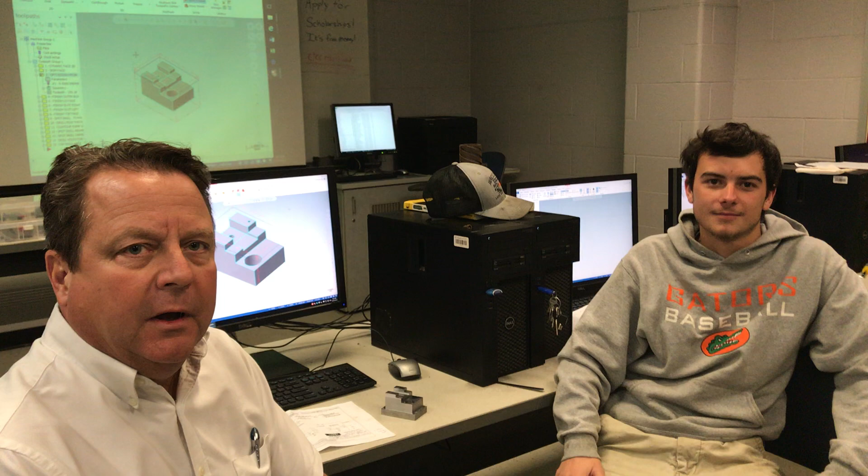All right, my name is Mr. Geppert, and I'm here at Cape Fear Community College Computer Integrated Machining Program to show my students how to best use dynamic roughing in Mastercam. And we learned something new here a little while ago, courtesy of the Barefoot people, and we're here tonight to talk about it.

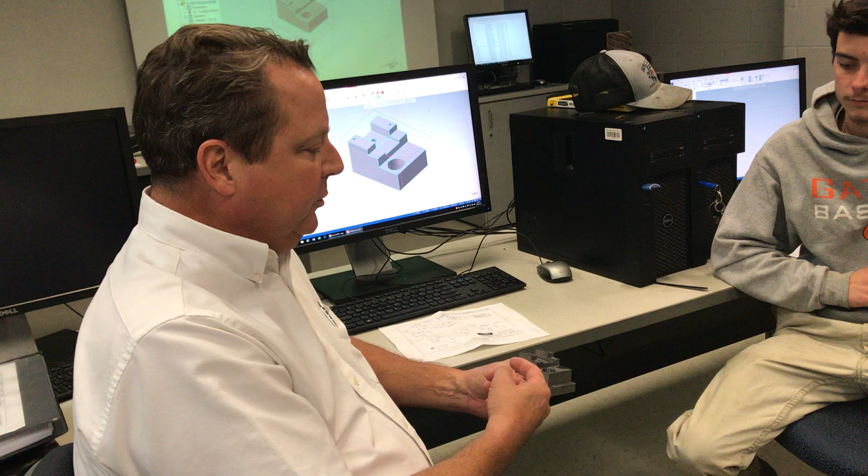In the past, we were making this step block from NIMS. And in the past, we had to attack the part using different Z levels and different tools, actually. But we found on a different part that had pockets that you can use dynamic OptiRough, which had in the past only been used for 3D parts, for 2D parts and not have to worry about the Z levels anymore.

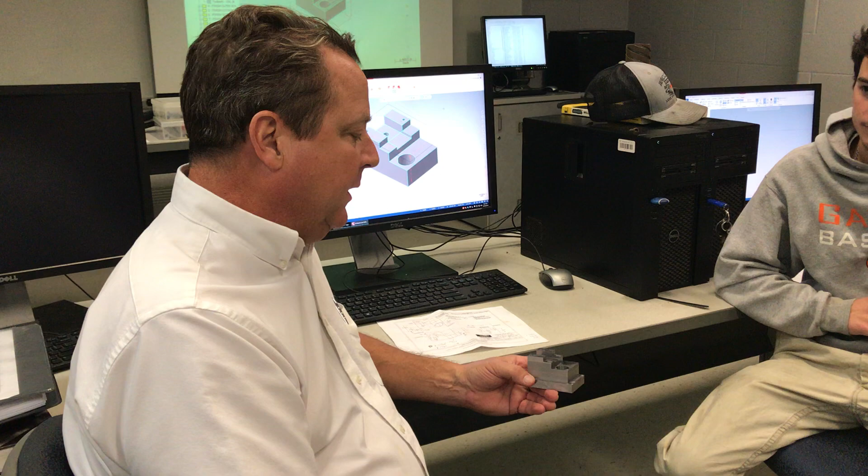The way this comes about is mainly through the fact that if you set the step down to equal the step up, and you set an outer border, and then tell it to take a strategy from the inside, Mastercam pretty much figures out the rest of it on its own. The roughing of the outside, the roughing of this step, and this slot was all done in one toolpath. So,

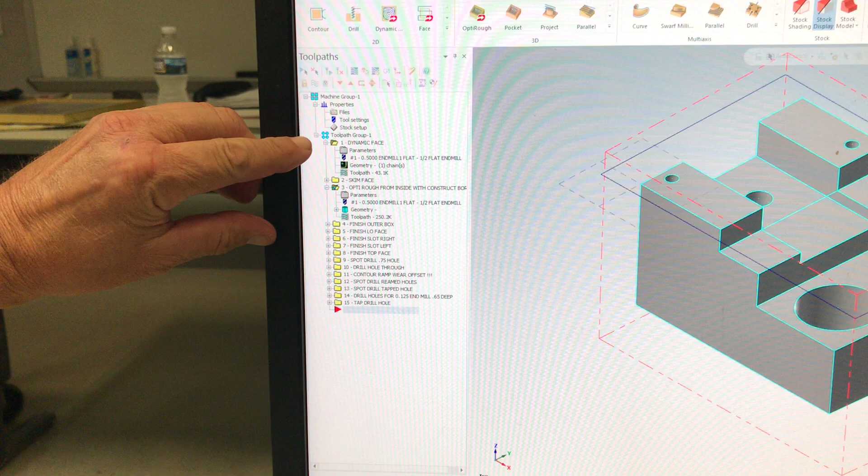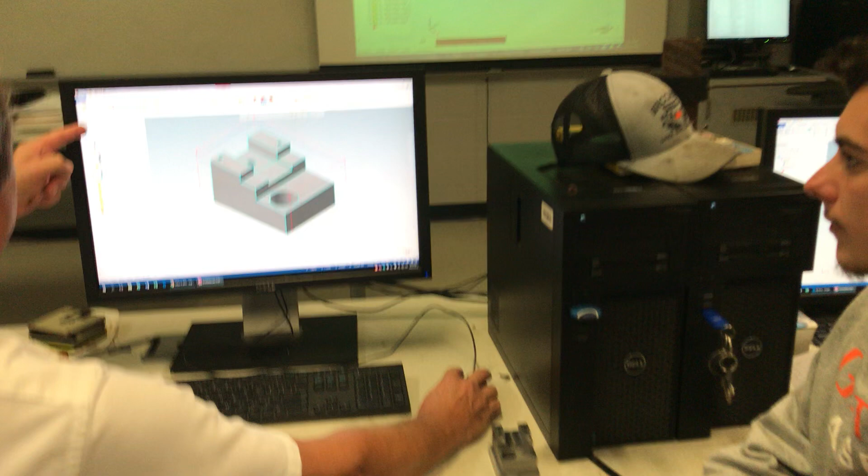if you would please come up, Austin, and show them the toolpaths that you use to make this whole part. All we're going to talk about here is dynamic facing and OptiRough from the inside with the construction border. The construction border is this blue line that we drew around the top of the part that is only slightly larger than the stock box. All right? So, I went up here on the 2D toolpaths and just chose the standard facing toolpath.

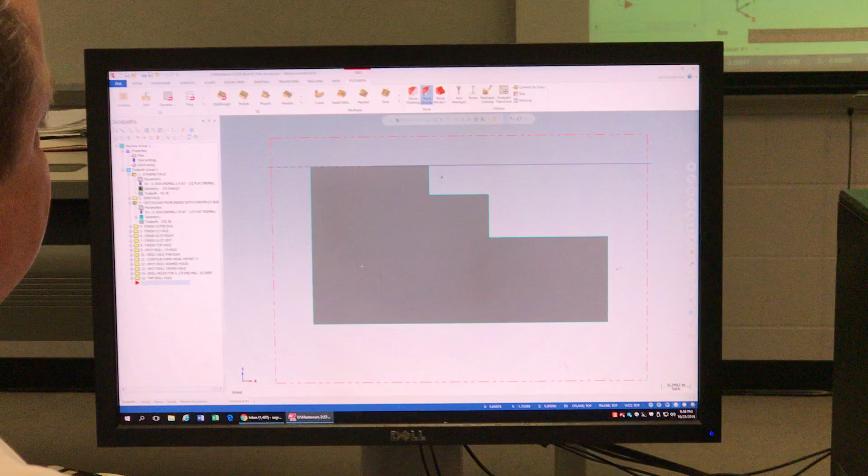By the way, this is tool steel, A2 tool steel, and we left about 1/4 inch of stock on the top, quite a bit on the bottom to hold it. As you can see here, that's what we had in the vise to hold it. And we left 1/4 inch of stock on top, and we used dynamic facing to face off the stock. Here are the parameters for dynamic facing. We just used a 1/2 inch flat end mill.

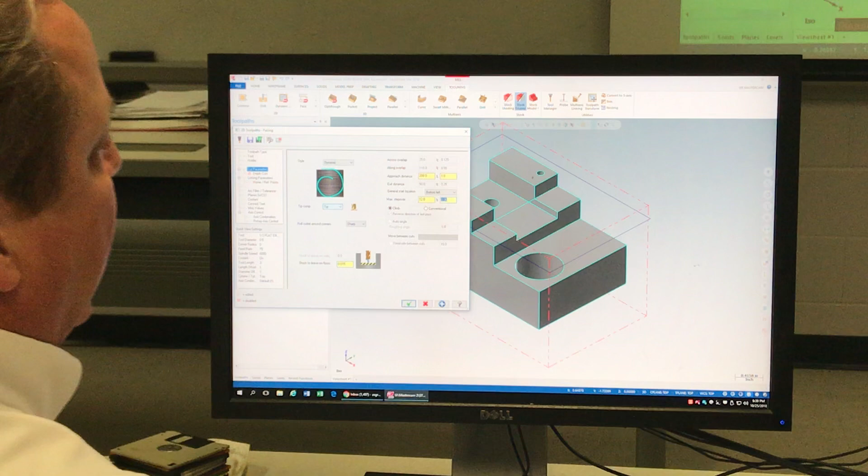We set a feed rate, and we turned it up on the machine, really, of about 75 inches per minute and 6,000 RPM, which is about 785 surface feet per minute. The cut parameters were here. We set the style to dynamic, and we set an approach distance of 1 inch away, and we set our step over. We could have been a little bit more generous, maybe 10 or 12% would have been fine for this dynamic roughing. We left 15 thousandths stock on the floors because we wanted to come back with a 3-inch face mill to leave a nice smooth finish on the face.

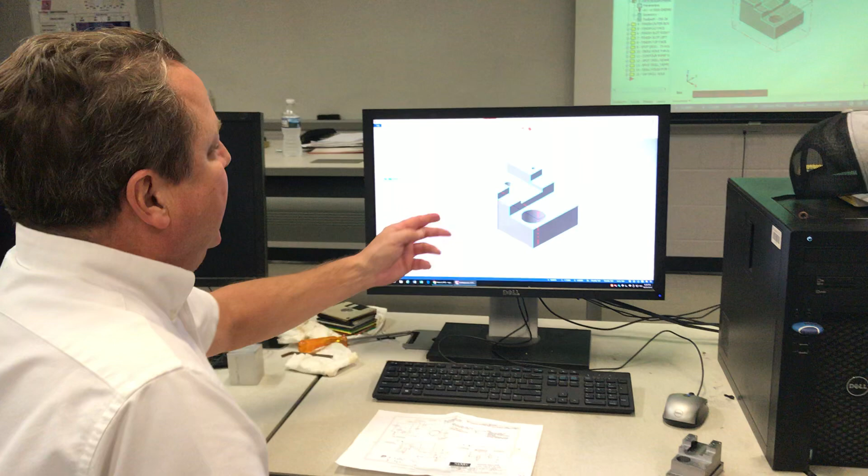Okay, now the linking parameters were all the same since we left the stock there. But here's another thing that they showed us at Barefoot CNC: this arc filter tolerancing can be set so that you cut down greatly on the amount of code that goes out on the machine. This was a problem for us. Our machines don't hold a lot of code, and we were having to cut up toolpaths or just send one toolpath at a time.

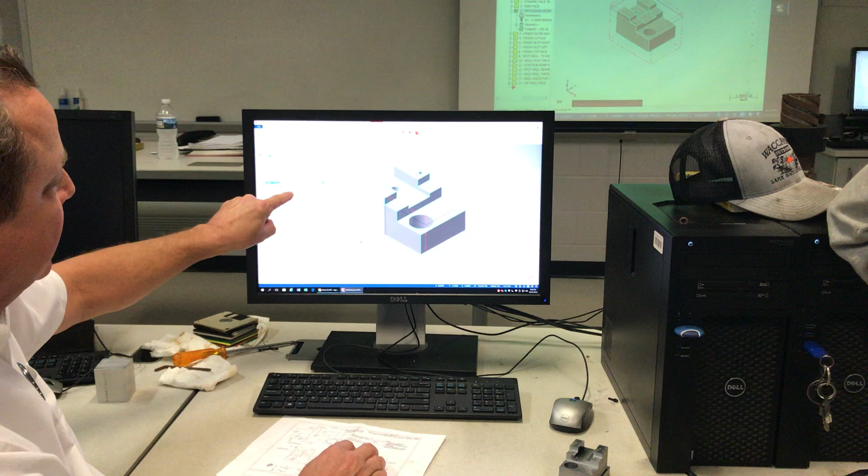We set the total tolerance here to 5 thousandths, and that cut down a lot on the code, but especially setting the line and arc filter settings, we just checked these 3 boxes, and then you set the line arc tolerancing to 50%. So what this does is the lines and arcs are not drawn so nicely and tightly, and it cuts down like 80 or 90% on the amount of code.

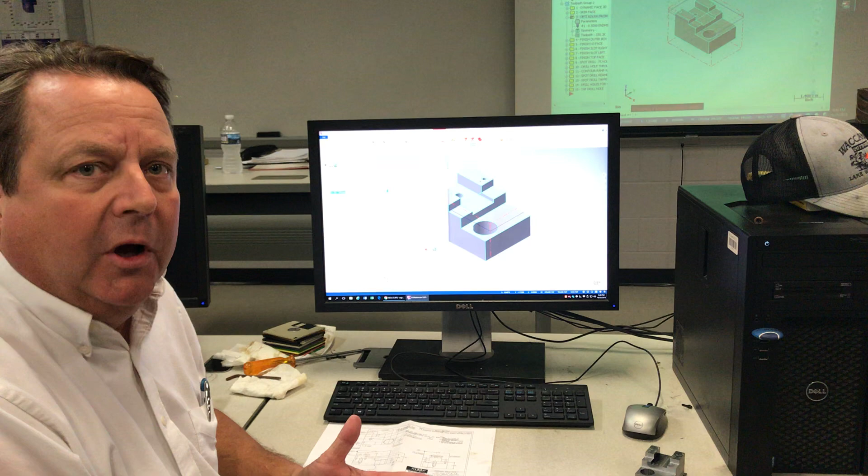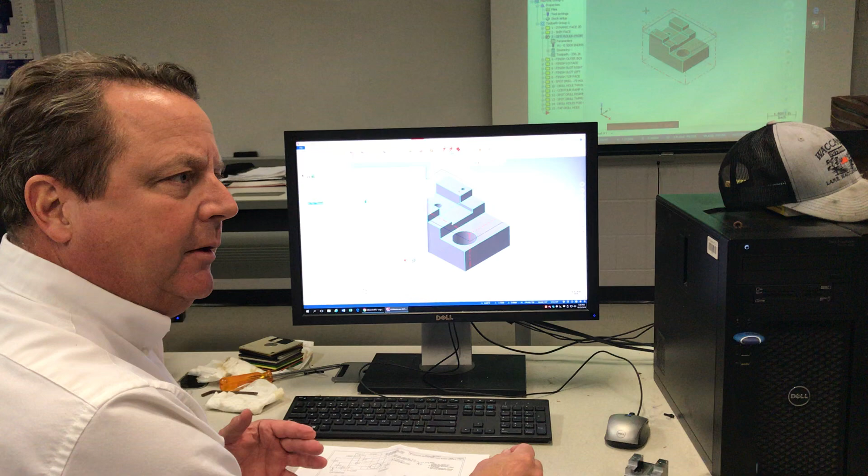Well, why not? We are just roughing. We're just cutting a rough part. We don't care about the finish necessarily all that much either. We want our tool to last, and we want to get rid of material. But mostly we want to get rid of material. We don't care really all that much about the false economy of a tool lasting. If the tool lasts a decent amount of time and we get our part off of the machine in 70% less time, well, that's wonderful.

So that's dynamic facing. That's been available to us for quite a while. So let's quickly backplot this and look at the amount of time, 1 minute and 38 seconds to do that, and the toolpath used 31K of code.

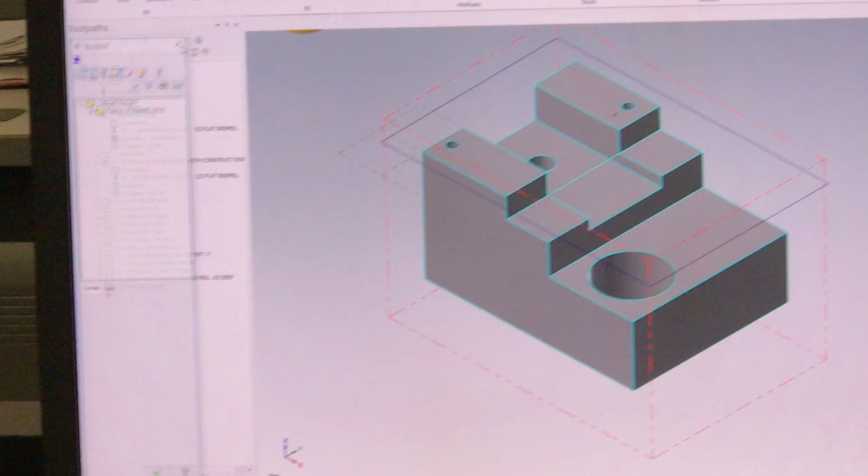If I go back and I change this to 1/1000th tolerance, and I take the line filter off, and I change this to 5%, say, the cut tolerance, to 1, apply it and go back, and I regenerate real quick, it goes to 389K of code. That is way more. 31 versus 389, that was 90% more, or however that would be figured.

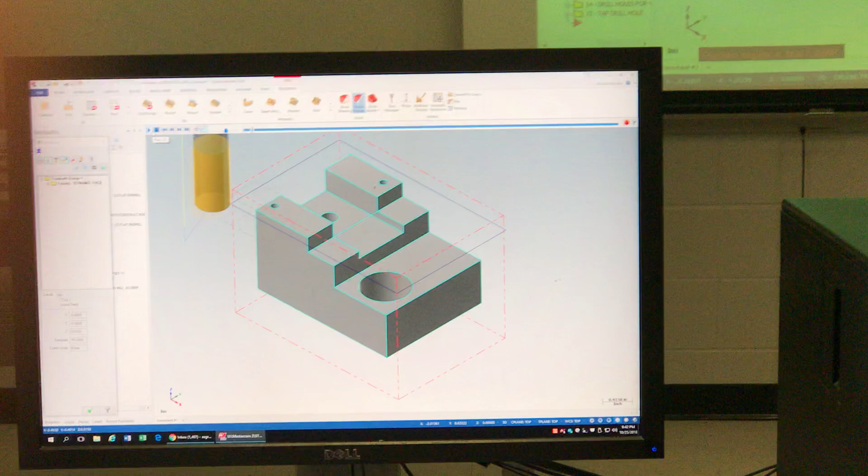So let's just go back and do this again, 0.005, then you set the line arc filter settings, 1, 2, 3, then we change this guy to 50%, and we are good to go. Regen, back down to 31, and let's watch the motion from above.

Speed her up a little bit. Our cutter has a little 0.015 radius on the side, and in the very center sometimes it'll leave a little radius island. So this does not necessarily face off all that well, and you may want to. A minute 38 seconds for the facing.

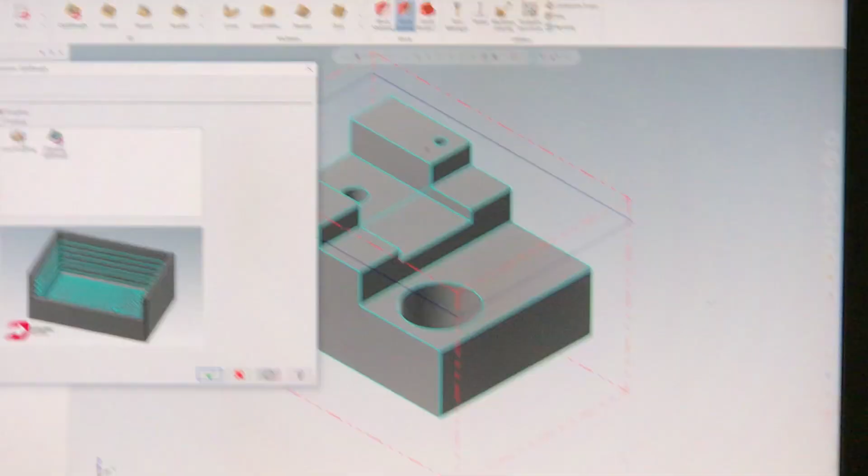So then we skim cut the face, so now we can go ahead and show you the wonderful OptiRough, usually a 3D toolpath, that is going to rough the entire part out with one toolpath. You see here, and this is Mastercam 2018, by the way, not even 2019. We leave 0.010 stock on the wall, 23 entities. It's basically just a solid model that drives all this.

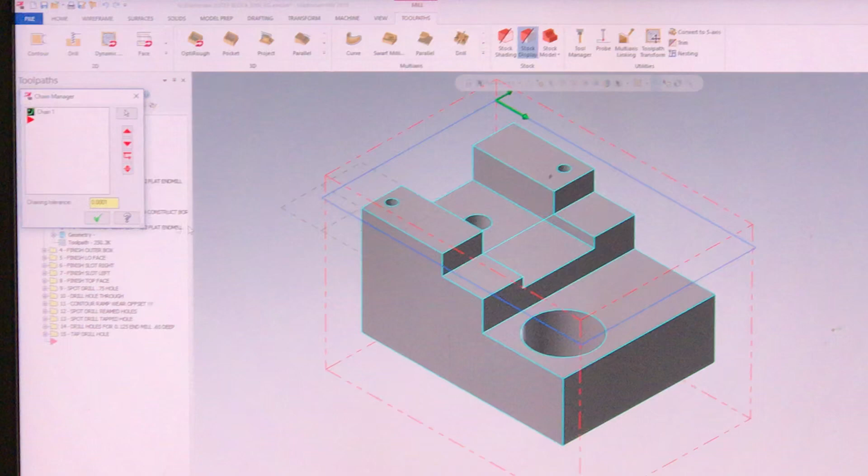The containment boundary is this blue box. That is the containment boundary. The strategy is from outside, compensate to the outside. Didn't touch anything else. No offset distance, no starter point. 1/2-inch flat end mill, I called it a ripper.

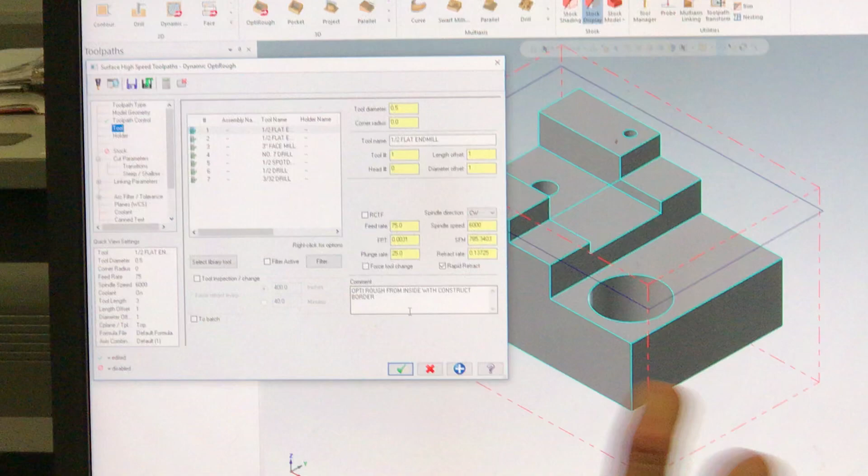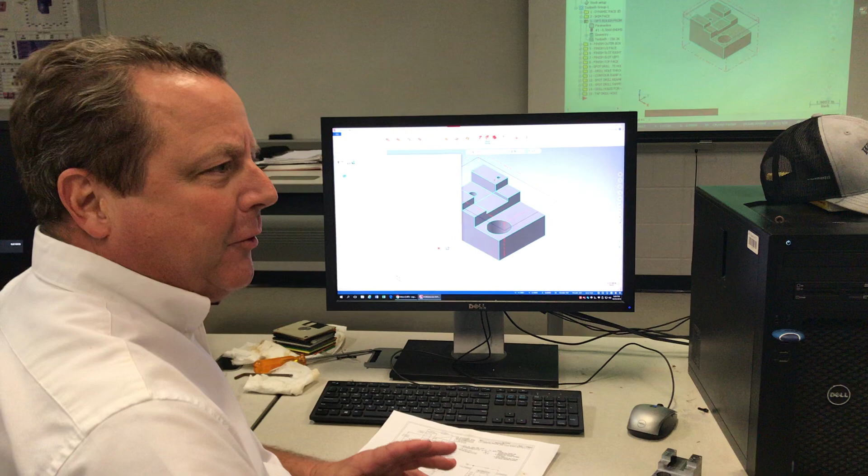It was an Ingersoll 5 flute, coated end mill, 1.5 inches of flute length, and we're gonna go down 1 3/8. So 6,000 RPM, 785 SFM, 75 feed rate. Plunge rate is 25. You got to watch this in Mastercam. Sometimes you'll go out with your code and this will be 0.1, and you're doing all this other great milling, and your cutter just slowly goes down to get ready and set up. So you got to watch that plunge rate.

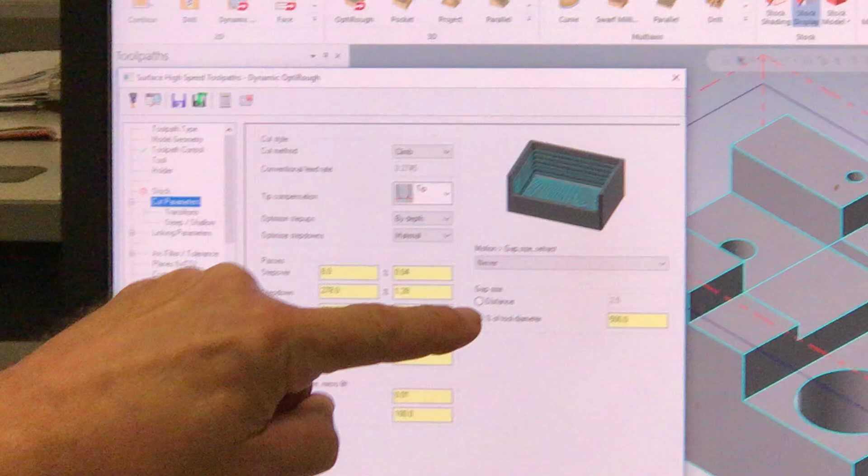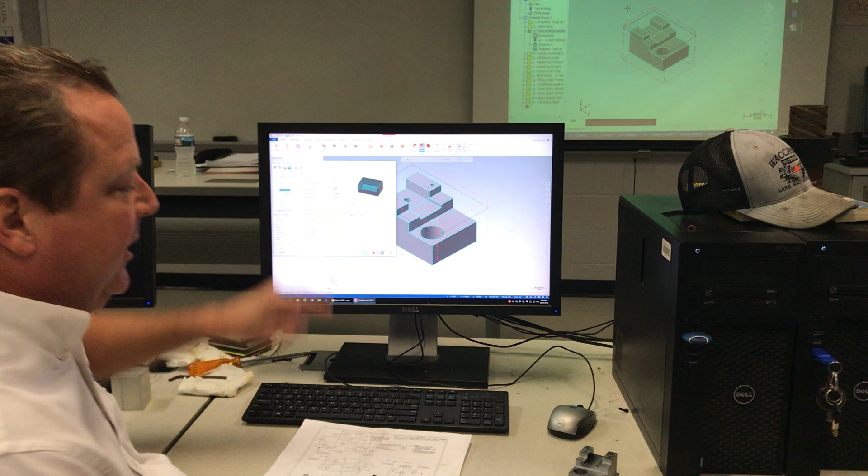And so then we set the minimum toolpath radius, which is another thing we learned. If you would zoom in here so that you can see. This minimum toolpath radius is critical. The standard, or the way it normally comes out on default, is a big toolpath radius. And in the past, it prevented my 1/2-inch end mill from letting me go in here to do that lovely tool motion in the center slot.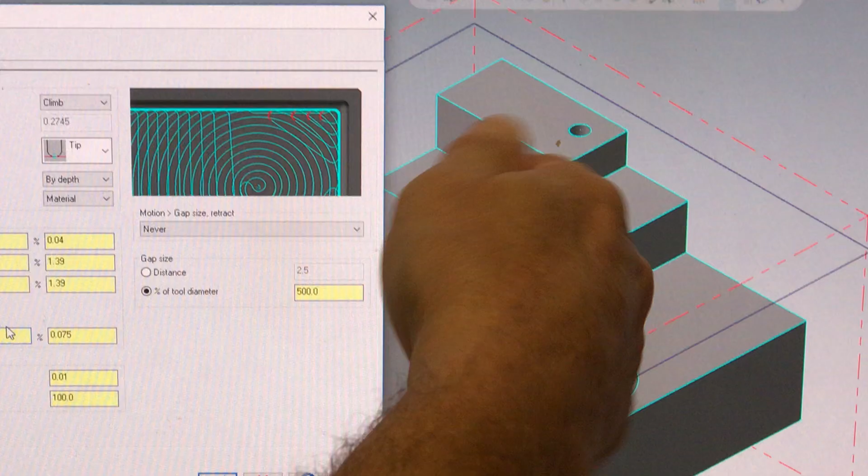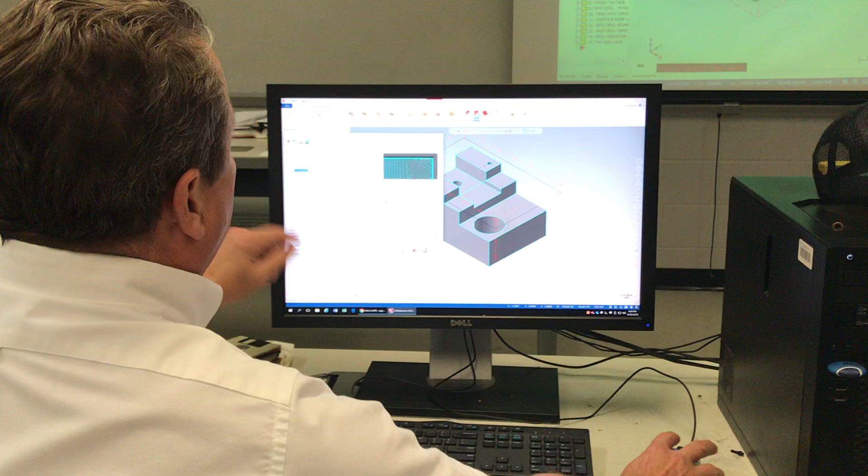So when we set this to only 15%, we're only increasing the toolpath radius or the area that it will fit in by 150 thousandths. By knocking this number down with the barefoot CNC guys, we then got it to do the entire part. So step down equals step up. And then it stepped up all the way and found all these other features on the part, all on its own, Mastercam did.

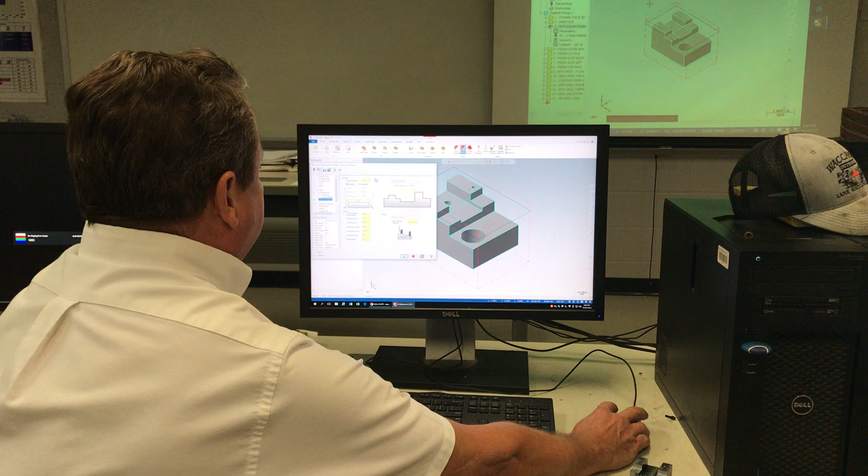We turned off steep and shallow. You can use this to detect the depth of the part, but we didn't have to do that because we knew it from our blueprint here. And now we set the arc filter tolerances to half of the stock on the wall. There's that 50%. And here are the planes. And all the rest of it we did nothing with. Linking parameters just sets up the air cutting moves. We don't have to do anything there. In the past we had to check this output feed move, but not anymore.

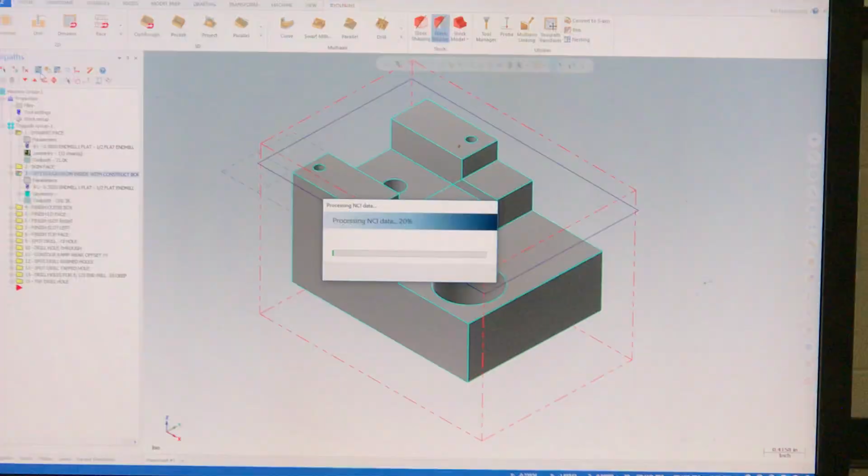Guess what? We're ready to cut a part in one toolpath. Rough it completely, leave 10 thousandths on everything, and not have to touch the geometry, not have to worry about Z. Let's verify it and have a look at it like this. I was really excited to see this because also the total time to rough this whole part out of A2 tool steel with lots of stock to get rid of, 6 minutes, 6 or 7 minutes.

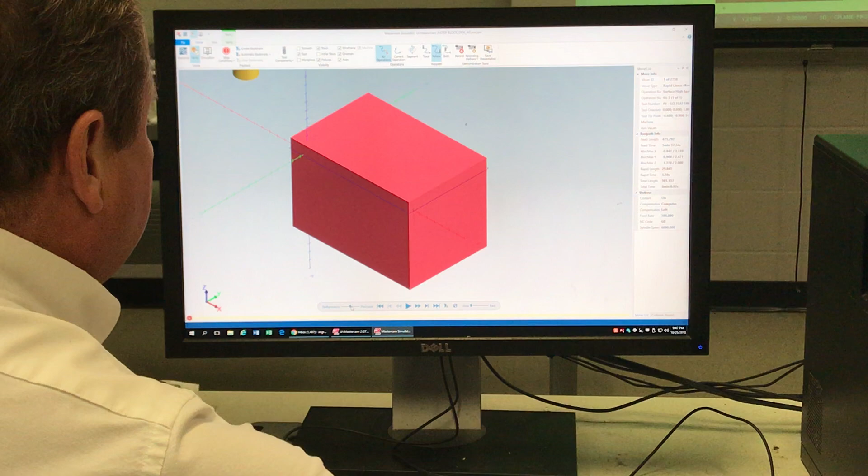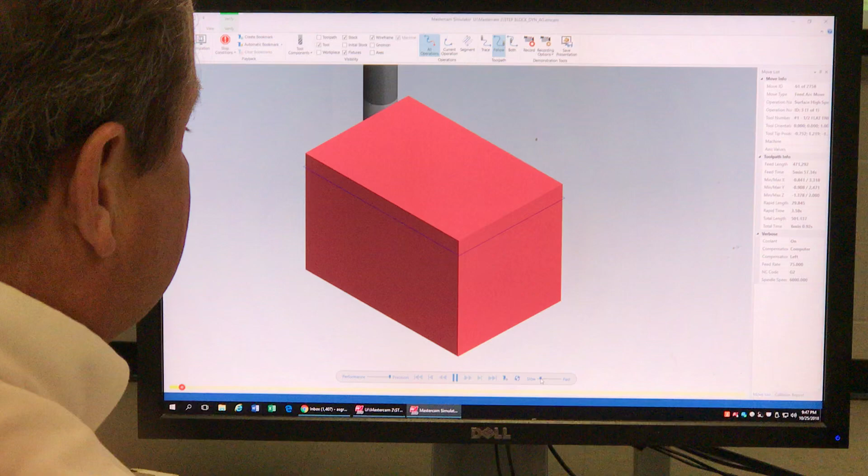And here I'm going to slow it down at first, turn up the precision, get rid of the gnomon and the axes, and I'll leave the wireframe and the stock and get rid of the holder. And here we go. It goes around, that's too slow. Around the outside, that first pass misses the corners. So this worked out very well on the actual part.

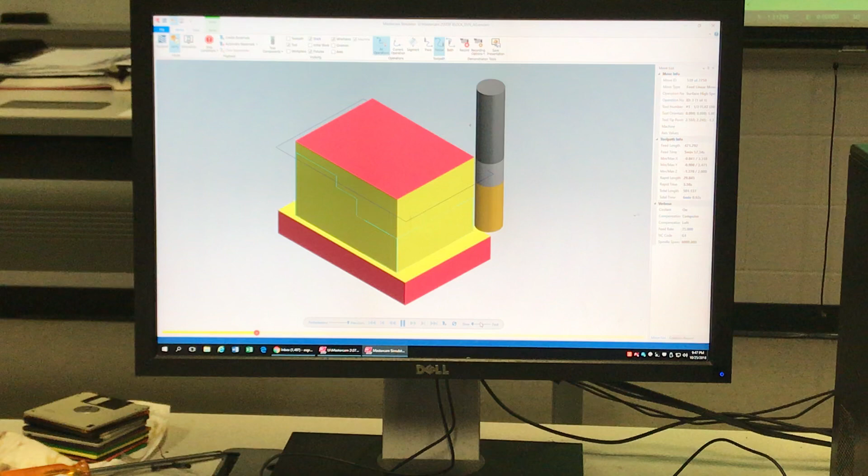Here it is finishing; it had more stock on the front and the back. Here it finishes the front. And like I said, no worries about Z. Here she steps up. This is the identical motion that it used to give us in dynamic contour. But I don't have to do that. Mastercam gives me dynamic contour automatically.

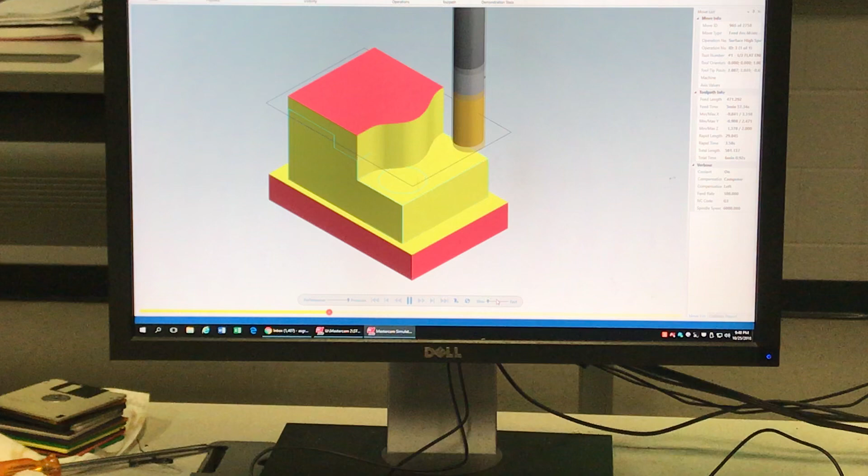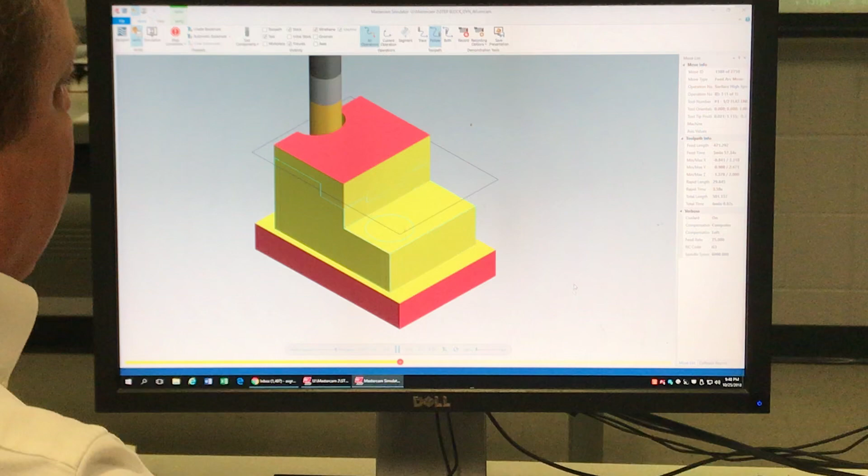Love that smooth motion. The tool doesn't squeal when we're out on the machine making it on our old Haas VF2. And here is that motion coming back from the backside, cutting this 3/8 deep slot right dead through the back. I'm going to move it from the top so you can kind of see that wallowing motion that I really like. That would take forever to program something like that by hand.

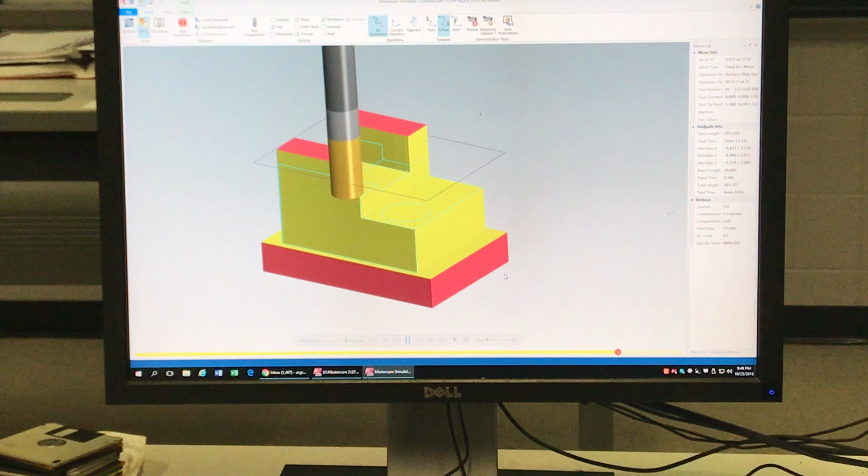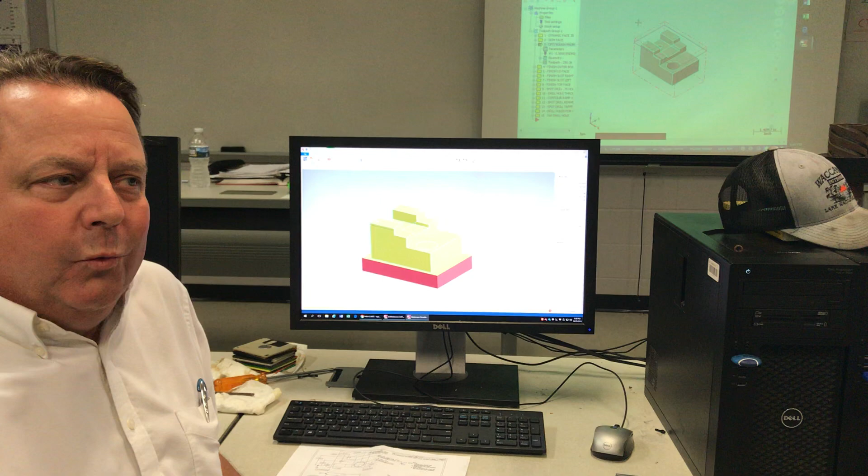Yeah, then now we come back for the last step, and it stays on those areas. It doesn't cut any air. Yep, lovely. And though it comes back up to cut these faces like this, that stock has already been taken care of by a previous facing operation. Voila, part roughed out. One operation, no geometry clicking.

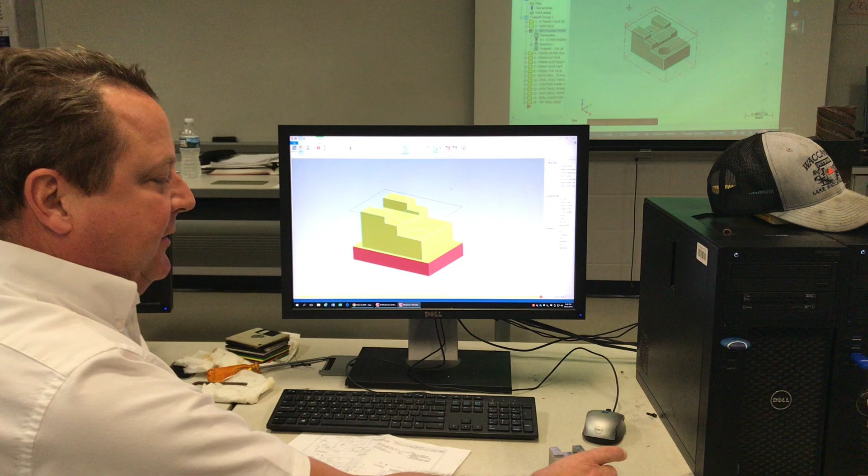All we did was click on this box and tell it the model, click on the whole model. Yeah, we clicked on the whole model and told it to leave 10 thousandths on every face. And it did that in reality. Here is the NIMS step block and the results.